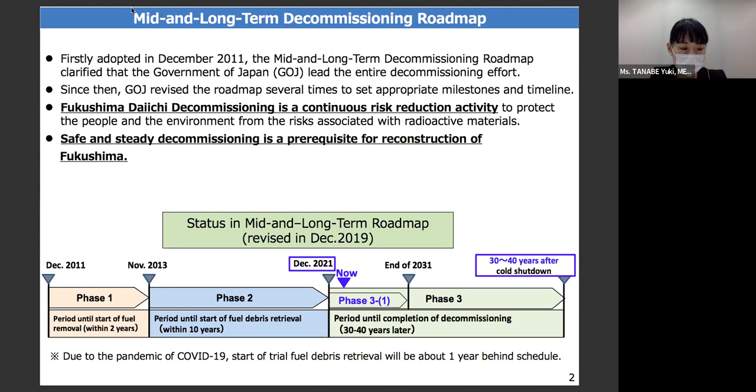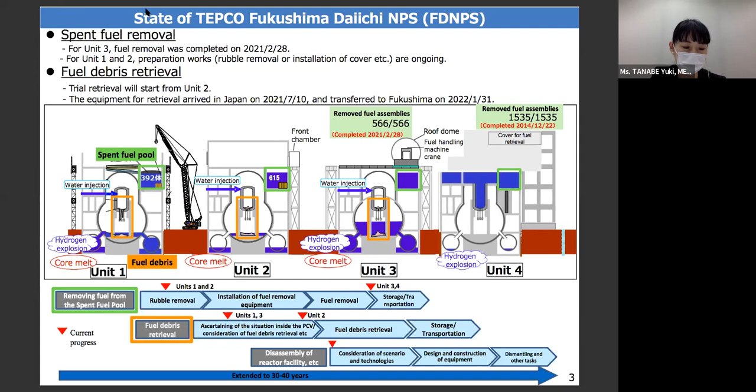In line with the progress of decommissioning, the roadmap has been revised several times to set the appropriate milestones and timeline. The latest roadmap was compiled in December 2019. The decommissioning will continue 30 to 40 years. As this slide shows, spent fuel removal at Unit 3 was completed in February of last year. The preparations for trial fuel debris retrieval at Unit 2 have been going well so far, and the trial will start soon.

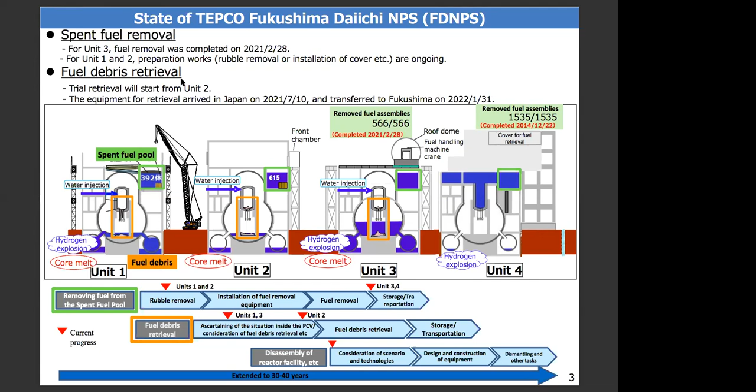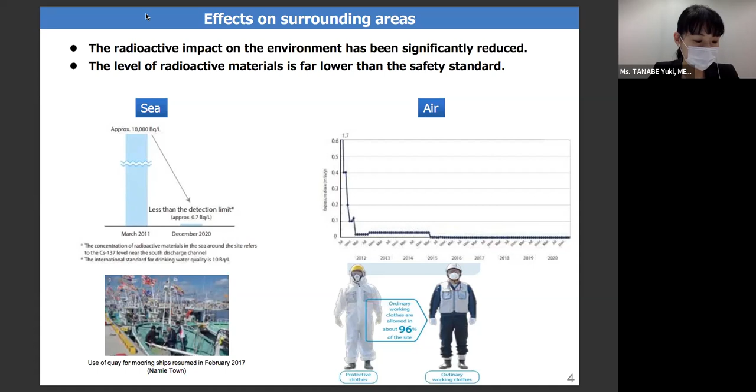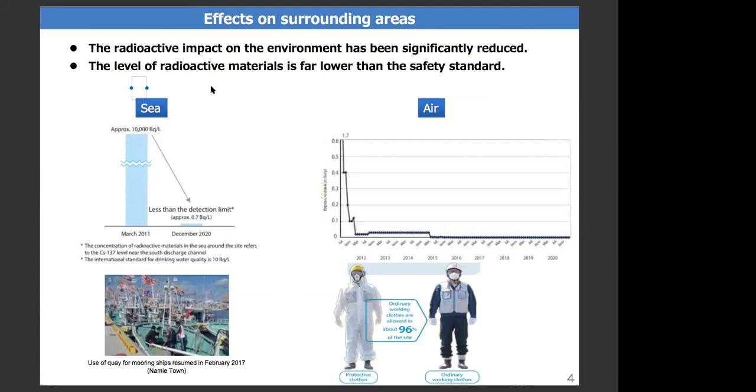The environment of Fukushima site has significantly improved. The current level of radioactive materials is far lower than the safety standard. IAEA has continuously checked the progress of Japan's decommissioning efforts at FDNPS since the accident occurred in 2011. The most recent was the fifth review conducted earlier last year, and the report was published in August 2021.

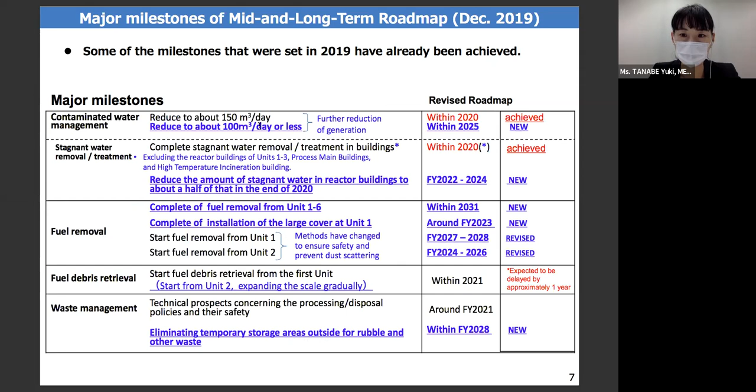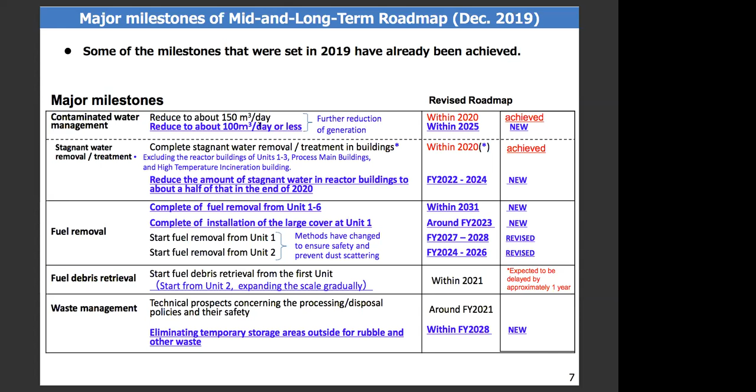And now let me move on to the next topic, which includes water management, fuel removal, and fuel debris retrieval, as well as waste management. Here are the milestones for the major issues in the roadmap I mentioned earlier. We have already achieved several of the major milestones in contaminated and stagnant water management, which are shown in red. And we also have to tackle other challenges according to the roadmap.

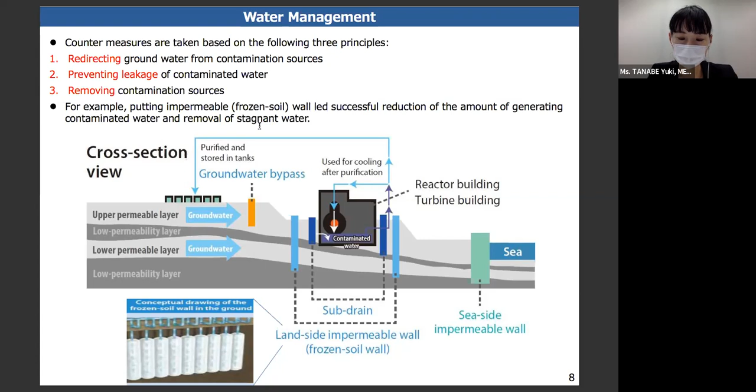And the next slide is about water management. The water management has been conducted based on three principles. Number one, redirecting groundwater from contamination sources. Two, preventing leakage of contaminated water. And three, removing contamination sources. As a result of the various measures taken, the amount of contaminated water generated was reduced to 140 cubic meters per day, maintaining a lower value than before.

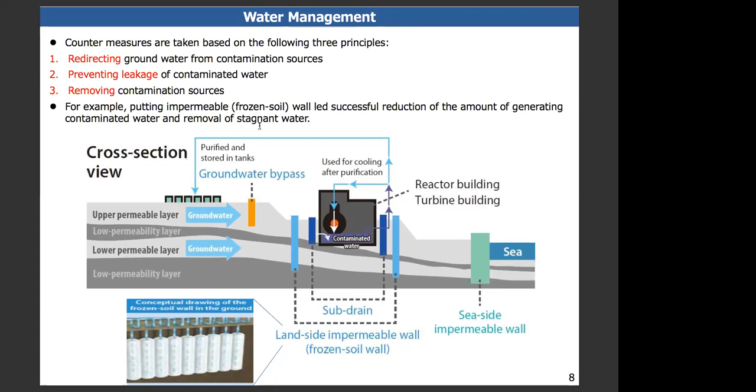Following Unit 4 in 2014, fuel removal from Unit 3 was completed in February 2021.

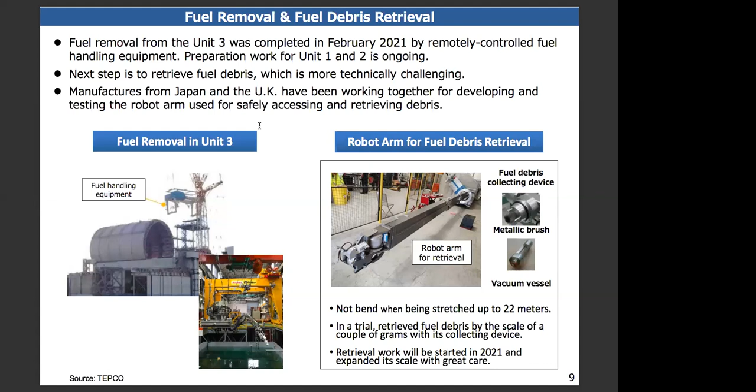In spite of the high dose rate, remotely controlled fuel handling equipment made the successful removal possible. Retrieving fuel debris is even harder than fuel removal. We need to utilize advanced technologies from Japan and abroad and develop new technologies. Details will be given later by TEPCO.

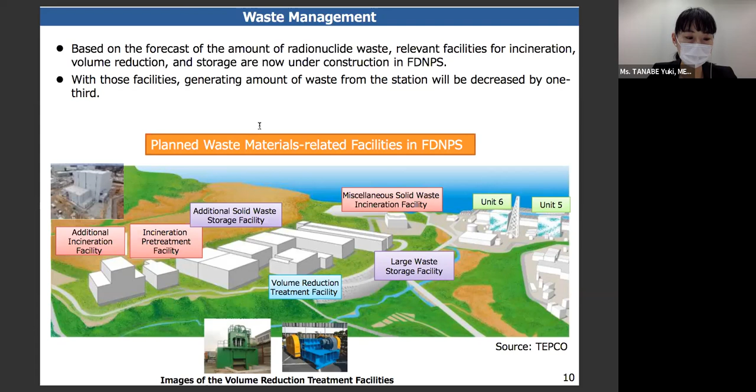And next is waste management. Waste management again is another challenging issue. The illustration and pictures in this slide show the overview of the planned facilities for waste management in the next decade. It is estimated that if these facilities are constructed, the amount of waste would decrease by 1/3 in 2030.

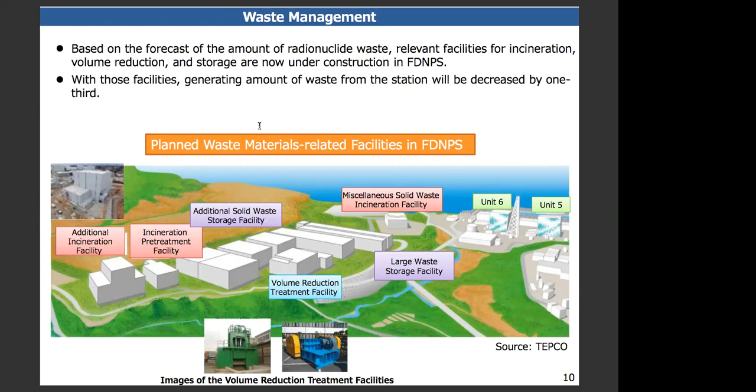At the end, I would like to touch on our efforts on stakeholder involvement. For the safe and successful decommissioning, stakeholder involvement is indispensable. First, Japan's Nuclear Damage Compensation and Decommissioning Facilitation Corporation, NDF, hosts an international conference every year since 2016 to discuss a wide variety of topics on decommissioning with various stakeholders and experts from Japan and abroad. The fifth forum was held last year in autumn at Fukushima.

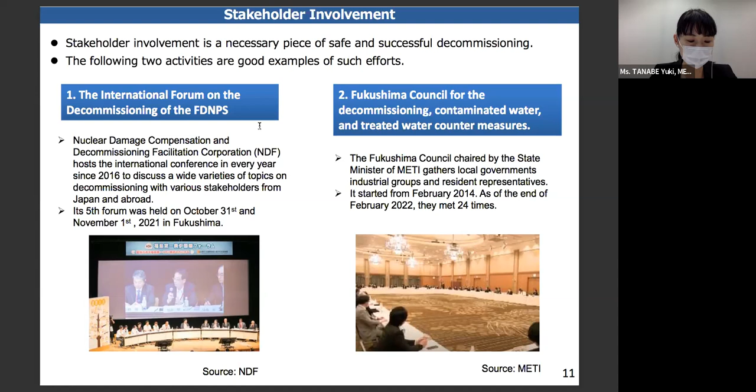And second, Fukushima Council for the Decommissioning Contaminated Water and Treated Water Countermeasures was established in February 2014. Up to now, they have met 24 times. This council is composed of local governments, industrial groups, and resident representatives, and strengthens information sharing and discussion about decommissioning of FDNPS.

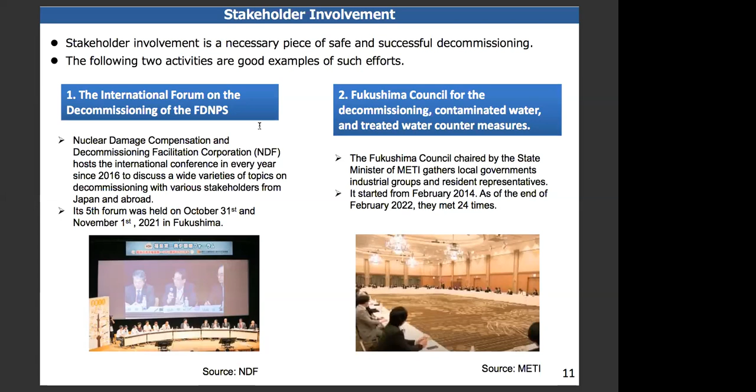Let me move on to talk about IAEA review mission on ALPS treated water. IAEA review mission visited Japan last month in February to conduct a review regarding the safety of handling of ALPS treated water. This review mission was conducted based on a terms of reference, TOR, on a comprehensive framework for cooperation on the handling of ALPS treated water, which was signed between the government of Japan and IAEA last July.

Along with an on-site visit at the FDNPS, the review focused on the following. 1. The radiological characterization of the water to be discharged. 2. Safety-related aspects of the water discharge process. 3. The environmental monitoring associated with the discharge. 4. The radiological environmental impact assessment related to ensuring the protection of people and environment. And 5. The regulatory control, including authorization, inspection, and assessment.

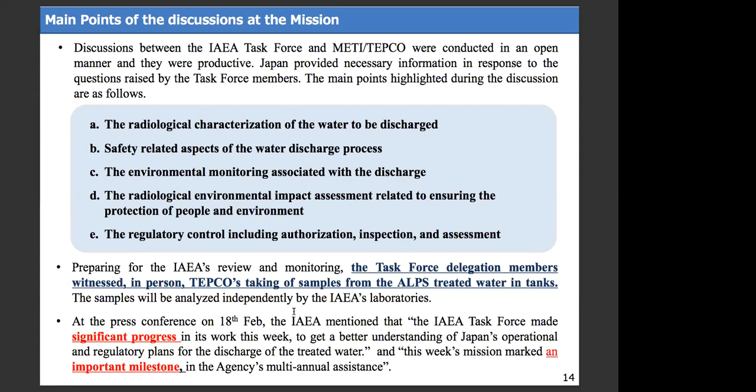At a press conference on the final day of the mission, the IAEA stated this mission was an important milestone in the IAEA's review mission that will continue in the future. The IAEA has launched a new web page on ALPS treated water. And this is an easy to understand format for the general public. So if you are interested, please visit the IAEA website.

In addition, in a press release regarding the review mission, IAEA Director General Grossi has stated the following. Number one, we will be fully transparent and independent in our reviews and reporting. Two, people everywhere can have full confidence that the water discharge is carried out without harming public health or the environment because IAEA is overseeing the process.

Both METI and TEPCO will follow up on the points raised during this review mission. In addition, the IAEA is scheduled to release a report on this mission in April of this year. A comprehensive report will be published before the water discharge starts in spring of 2023.

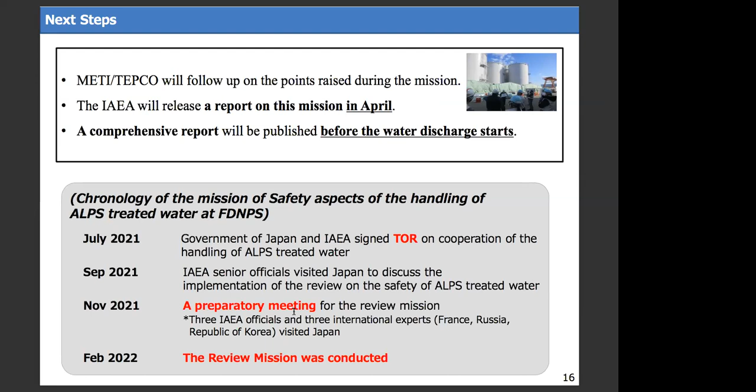This concludes my explanation. Thank you for your attention. Okay, Mr. Ono, please.

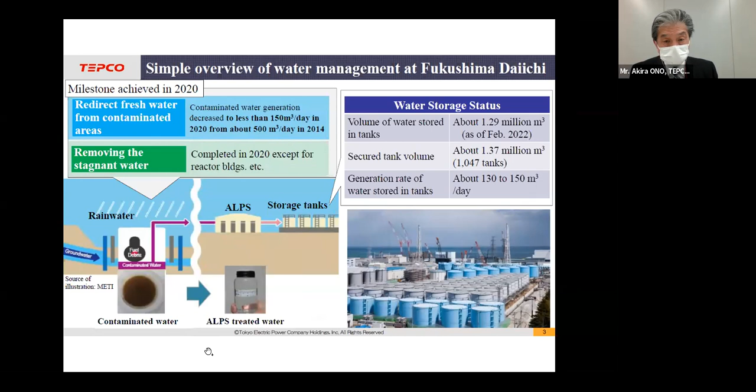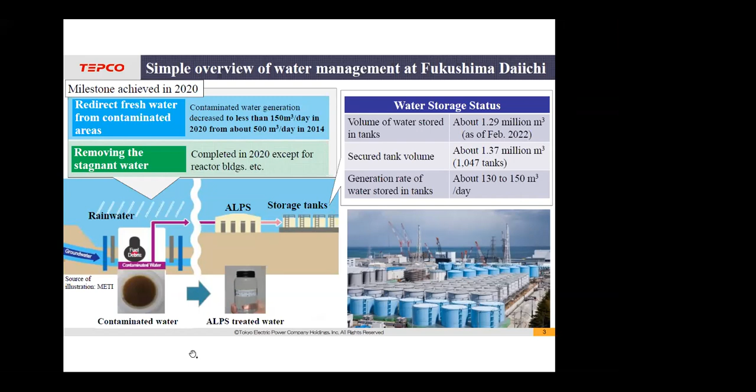Well, some people would say that we should continue to build additional tanks, but we must make effective use of the power plant site in order to proceed with well-balanced decommissioning, taking into account the storage of fuel debris and other materials that pose a higher risk. And therefore, it is becoming more and more difficult to continue to build additional tanks. And realistically thinking, I think that this will be very difficult.

Therefore, given this backdrop, on April 13th last year, the Japanese government established a basic policy regarding handling of ALPS treated water and to discharge the water into the ocean at Fukushima Daiichi. And based on this policy, on April 16th, we announced a future basic response.

And the basic policy is in discharging water into the ocean, we will not only comply with regulatory standards based on Japanese laws and regulations, but also with relevant international laws and practices. Also, it says that we will ensure that the water to be discharged is safe through the implementation of radiation impact assessments, amongst others, listed on the right.

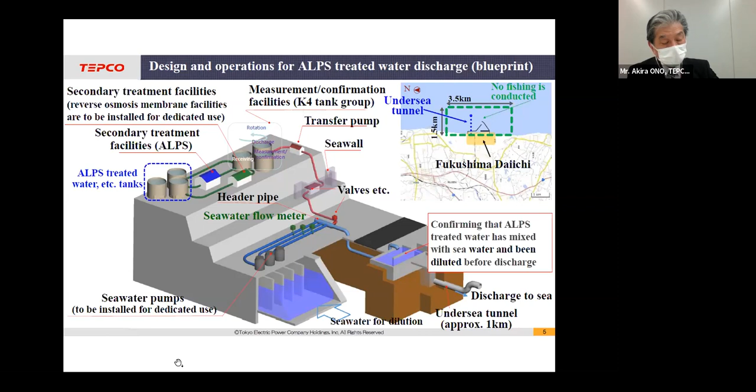Now, as for the other nuclides that have already met the national standard, the concentration will be further reduced by more than 100 times due to the dilution. And finally, according to the plan, the diluted water will be discharged approximately 1 kilometer from the coastline after going through an undersea tunnel.

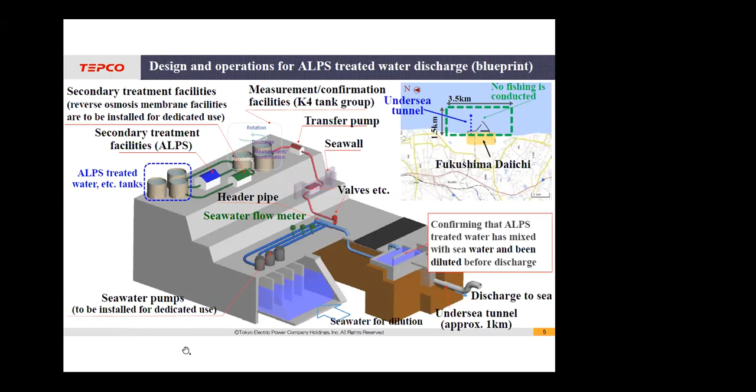Next, I'd like to discuss briefly our plans for ocean monitoring. As you can see on the left side of this slide, in areas 2 kilometers from the power plant, we will additionally sample at the locations indicated by the red rectangles, namely A, B, and C.

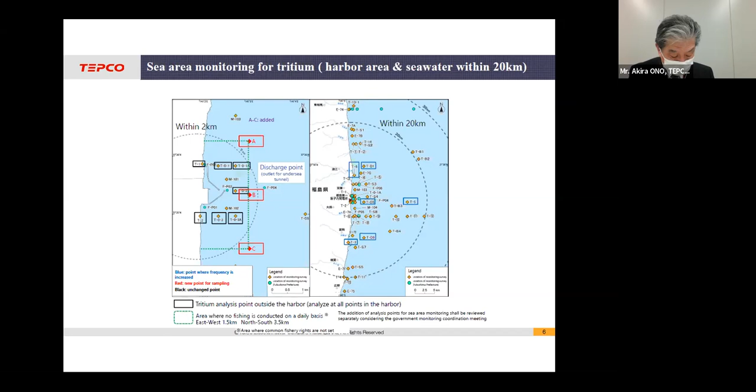And as shown on the right-hand side, the frequency of tritium analysis will be increased at the 6 locations indicated with the blue rectangles within a 20-kilometer radius. In addition, we will increase the number of sampling points and nuclides to be measured for marine products in order to firmly demonstrate that they are safe.

And furthermore, last November, we released a report on the results of our assessment of the radiological impact on humans and the environment in the event of an ocean discharge of ALPS treated water. And this is an illustration of what was included in the report. The left is a visualization of the amount of radiation humans are exposed to in various situations.

As you can see here, the human impact of the ALPS water discharge is at the bottom left, showing that the annual exposure is much lower than an X-ray exam taken during a dental checkup. And on the right-hand side, you see the effects on plants and animals, and these again are much lower than the ICRP threshold.

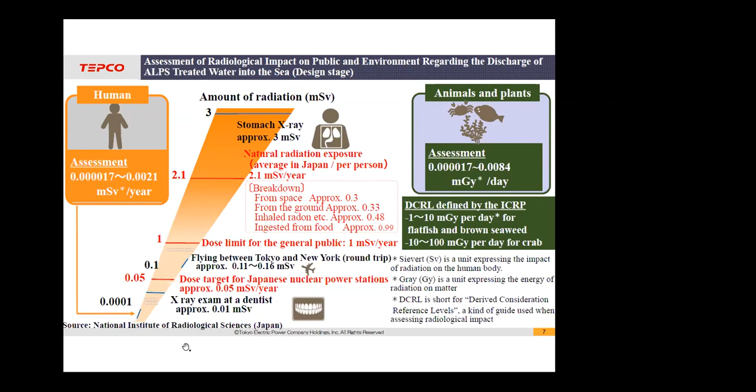This assessment is currently being reviewed by the Japanese NRA and will be reviewed by experts from IAEA. And listening to the opinions both from the Japanese NRA as well as IAEA, if necessary, we intend to update this report.

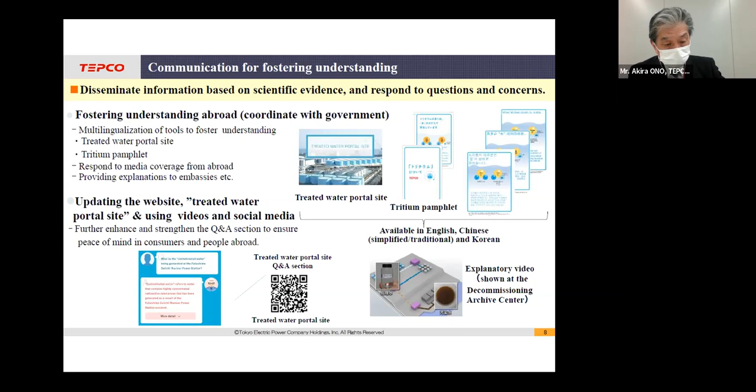And lastly, I would like to touch on our communication efforts targeting overseas audiences. We have established a portal site for treated water to help people overseas understand the safety of discharging ALPS treated water into the ocean. And also, we have published a booklet that explains the properties of tritium, the main nuclide in ALPS treated water, in an easy to understand manner. And we hope sincerely that these initiatives will help you understand the situation.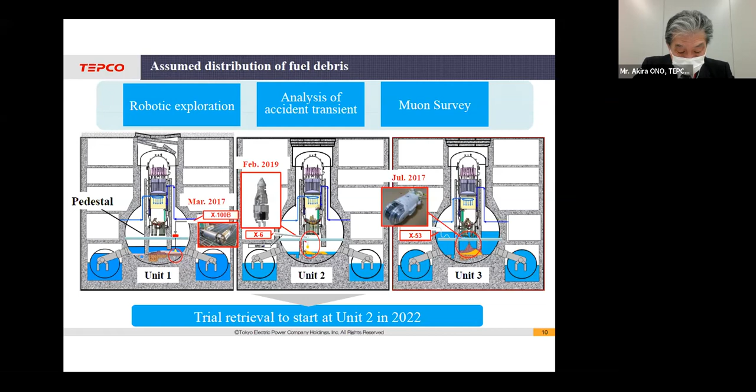In Unit 1, it can be said that almost all the fuel debris has fallen to the bottom of the PCV. In Unit 2, it is assumed that some of the molten fuel has fallen to the bottom of the RPV as well as the bottom of the PCV, and some still remains in the reactor core. Unit 3 is assumed to be in an intermediate situation between Units 1 and 2.

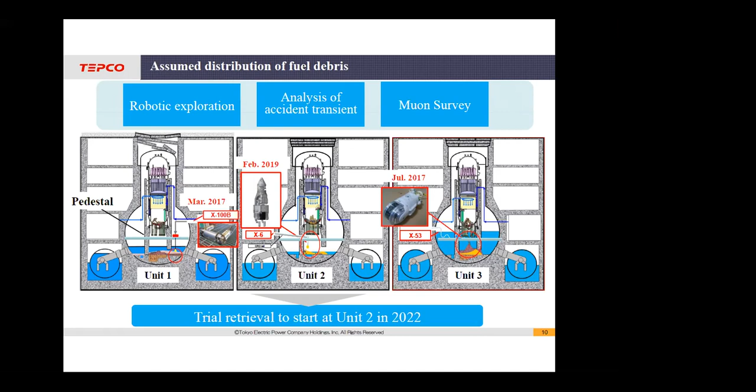Of these 3 units, Unit 2 was selected as the first for fuel debris retrieval, which is due to start before the end of this year. At the lower left of this slide, we show a concrete image of a small-scale retrieval operation. An access route is created through a penetration hole, which is called X6, through which a robot arm is inserted.

As shown in the upper left corner of the slide, this X6 penetration hole is the same route that we used about 3 years ago when we conducted a survey using a telescopic device. And the survey back then, as shown in the photo, was one in which we used a finger-structured device to pick up deposits that were thought to contain debris.

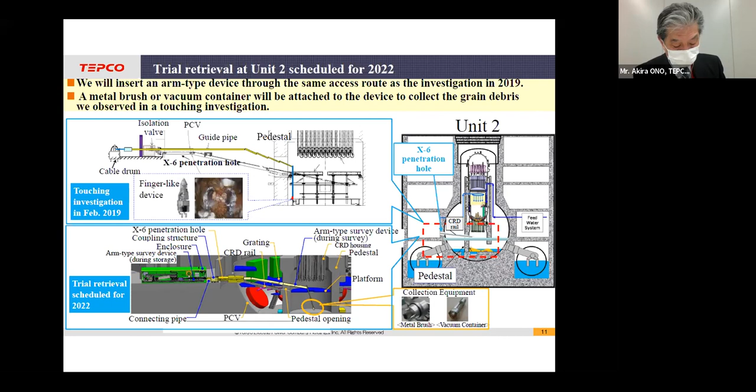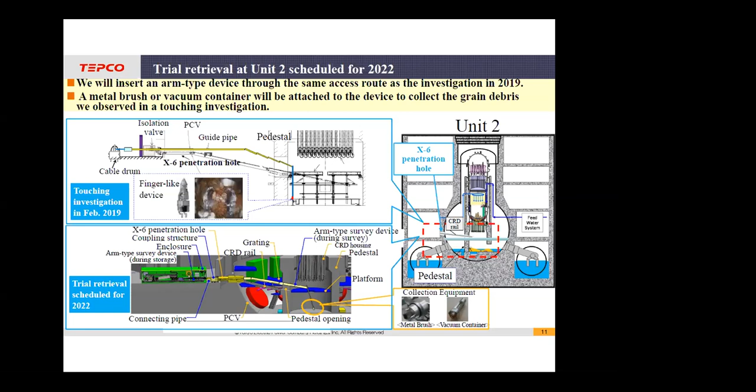This time, we are planning to collect a small amount of granular debris. And naturally, we also plan to analyze the composition of the recovered debris. As a matter of fact, this equipment was developed in the UK. The arm can be extended up to 22 meters to reach the inside of the pedestal in the PCV.

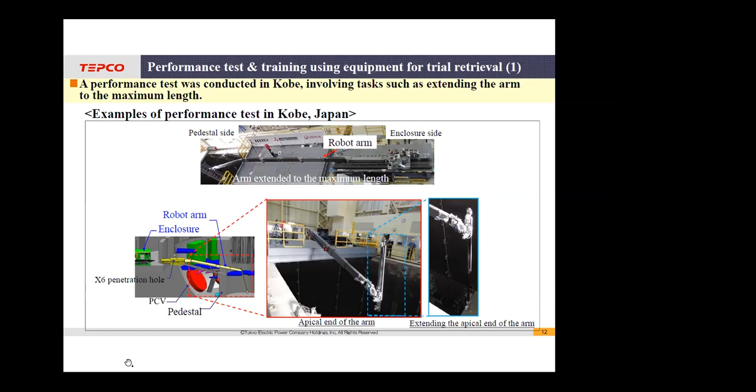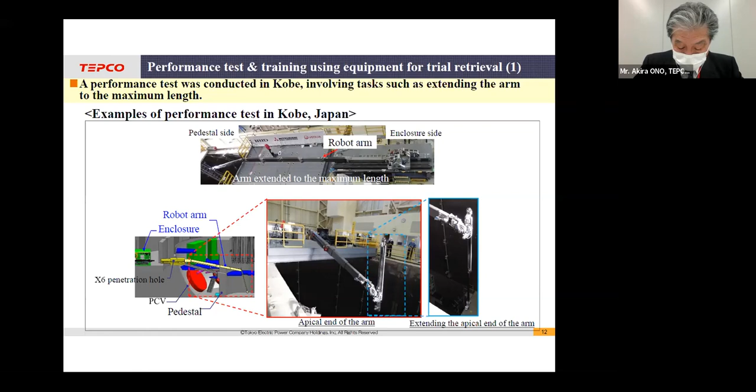This retrieval equipment arrived in Japan last July. And since August, the robot arm has been undergoing performance verification tests and operational training at the Kobe plant. And this has been completed, and the system has arrived at Naraha Center for Remote Control Technology Development, abbreviated as NARREC, near Fukushima Daiichi on January 31st.

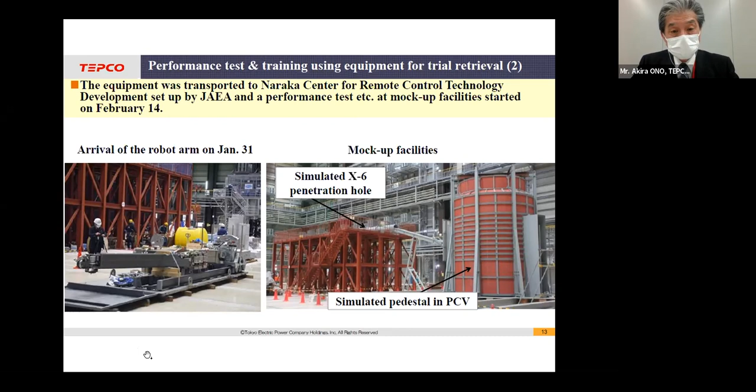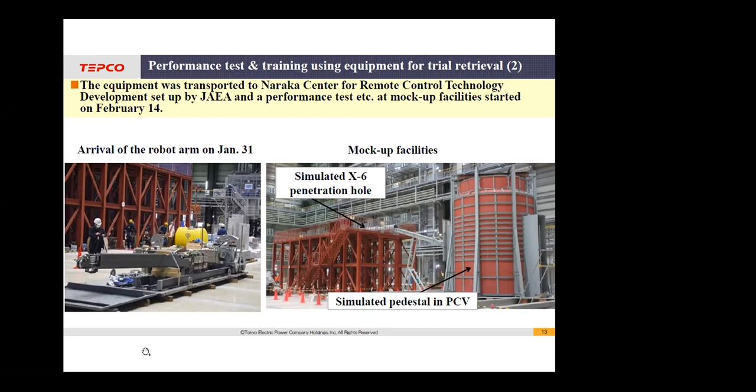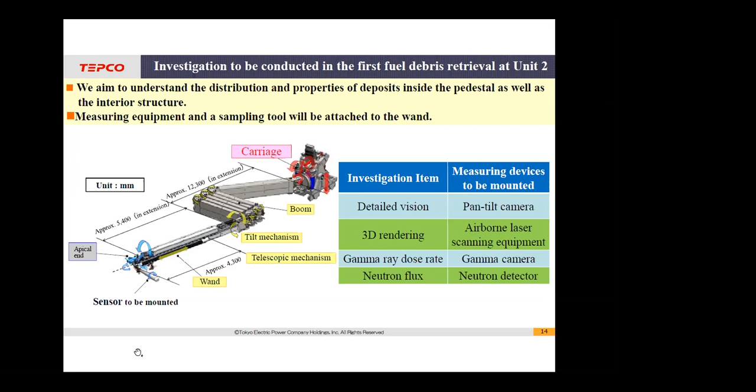As shown here, performance verification tests and operational training are being conducted at the site using the equipment that simulates the actual equipment. And using the same equipment, we also intend to survey the interior. By changing the device attached to the end of the arm, we plan not only to take camera images, but also measure the 3D rendering using a laser measurement device, measure the dose rate using a gamma camera, and the neutron flux using a neutron detector.

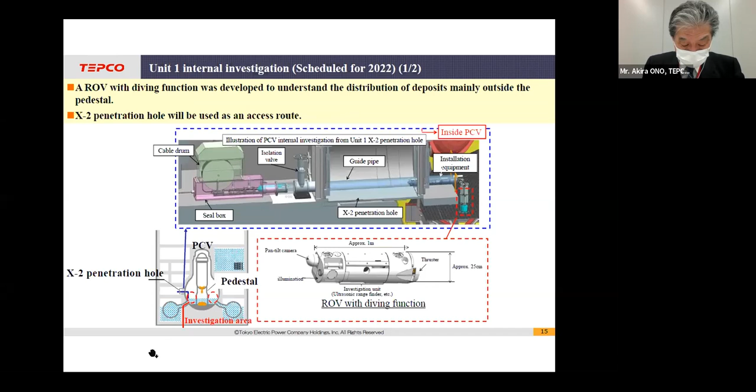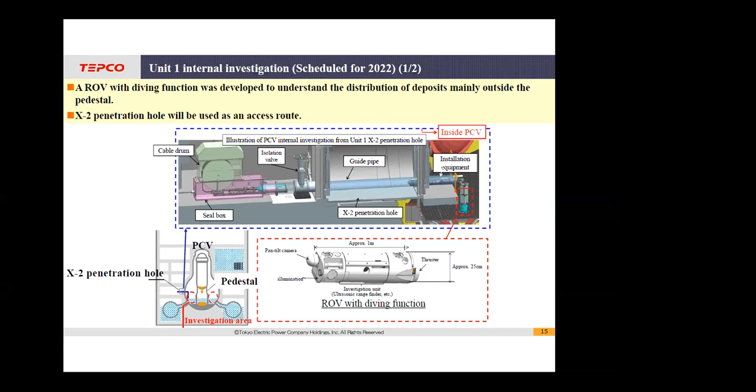This is Unit 1, but I would also like to talk about the recently initiated plan to investigate the interior of Unit 1 using an ROV. And here is the survey workflow and survey items. As you can see, there are 6 types of ROVs which can be operated underwater. The first ROV-A is responsible for pre-installing the guide rings inside. And the other ROVs will pass through these rings to prevent the cables from coming in contact with internal structures and getting caught.

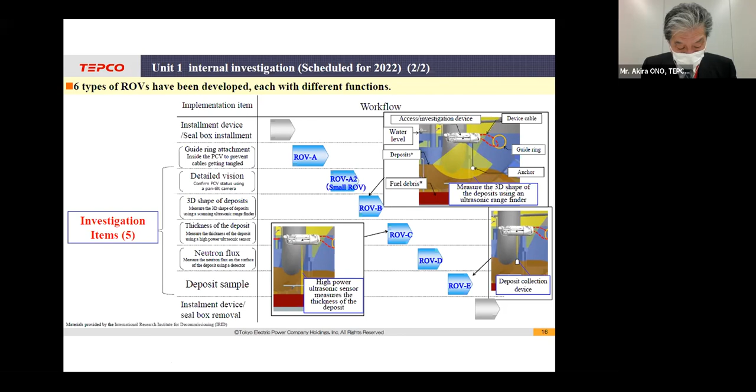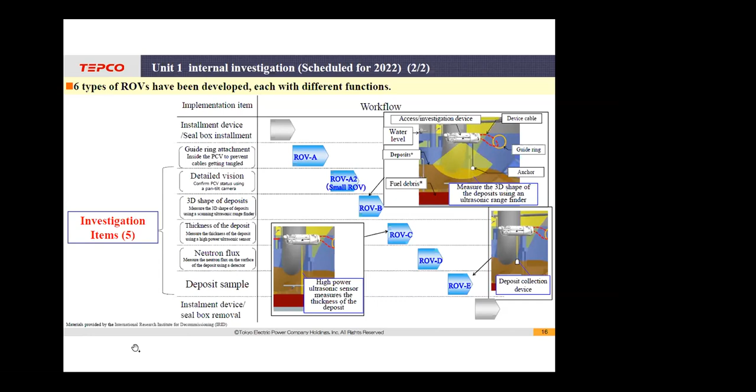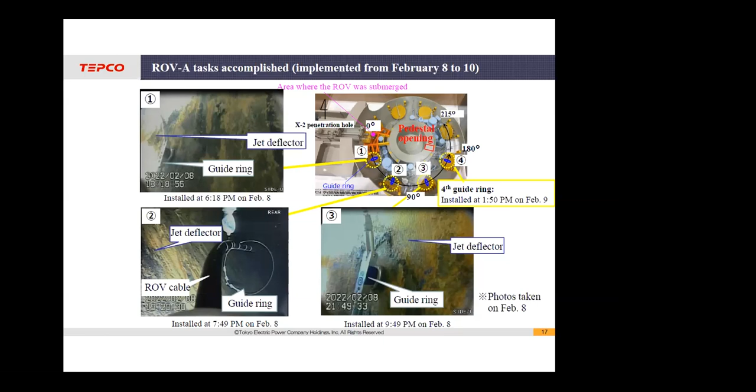And each of the 5 ROVs, except for ROV-A, will have different survey objectives. To be more specific, detailed visual inspection, measurement of the 3D rendering and thickness of deposits, measurement of neutron flux, and small volume sampling will be conducted. Installation of 4 guide rings was completed in early February using ROV-A. On the upper right, we show the southern route where the ROV-A submerged underwater around the periphery of the pedestal. And when the guide rings were installed, an image of the area east-northeast of the PCV circled in red in the upper left figure was captured.

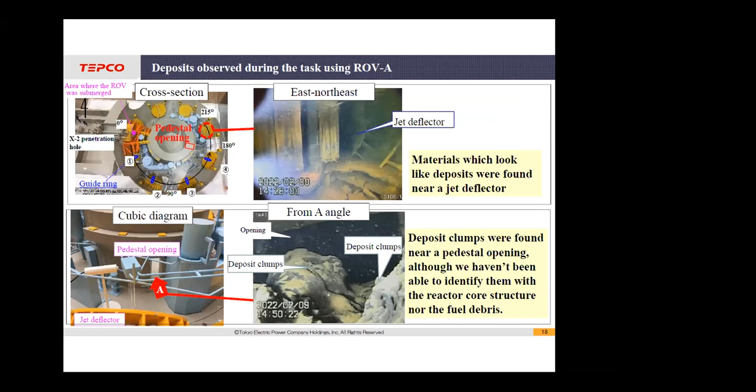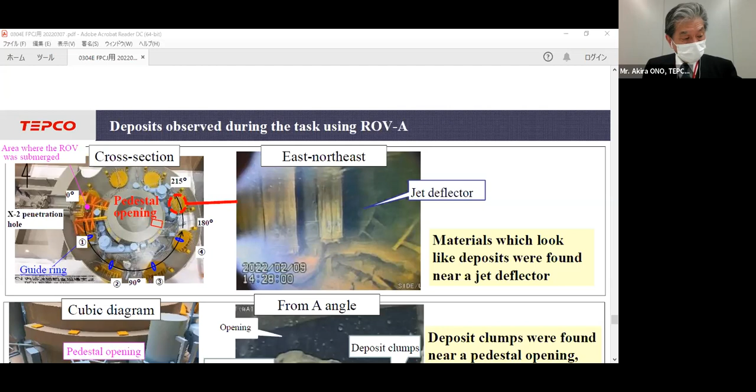And as you can see here, there are some deposits around the jet deflector. And as you can see on the bottom left, we can see the area near the pedestal openings. And also at the bottom right, we see that there are deposit clumps. However, at this point in time, we have not been able to identify whether this is fuel debris or not. And now we'd like to show you some of the images that were captured. First, the guide ring installation scene, next, when the ROV passed through the guide ring, and last is an image of the deposits near the pedestal.

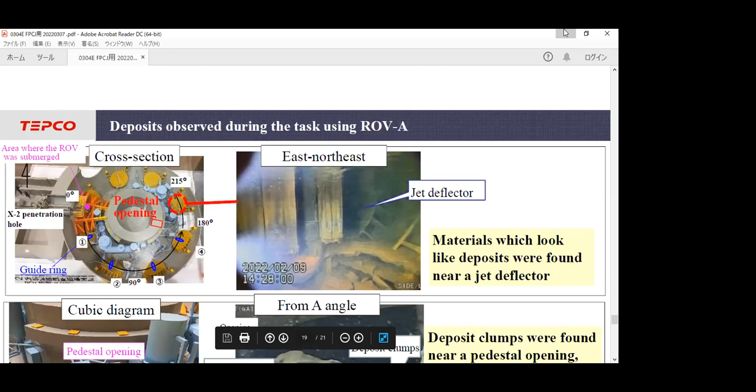Can you show the video? And we ask for your indulgence.